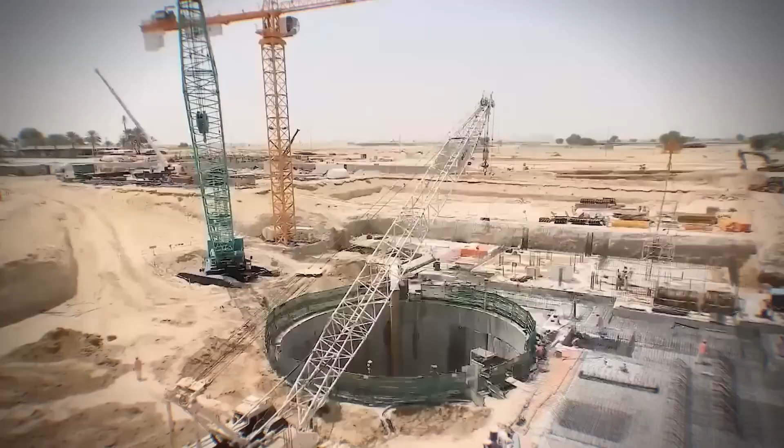During the construction of the world's deepest diving pool in Dubai, when a tunnel 45 meters deep had already been excavated, the engineering team faced an unexpected obstacle. News emerged that in Poland, a diving pool called Deep Spot had recently opened, with the same depth of 45 meters. It was clear that if Dubai wanted the world record for the deepest pool, its depth would have to be increased from 45 meters to 60 meters.

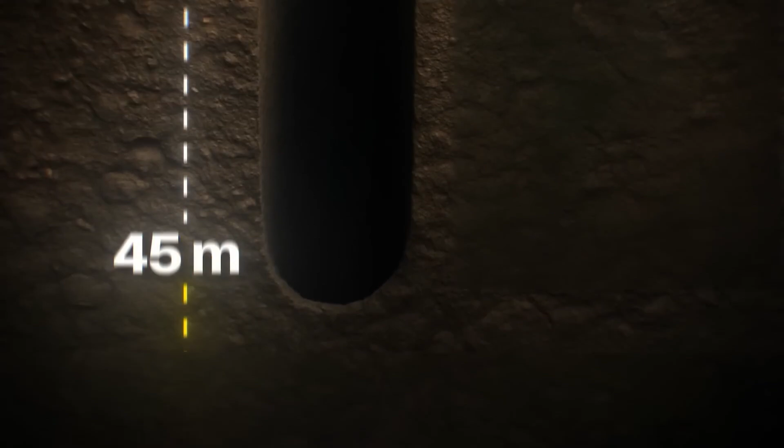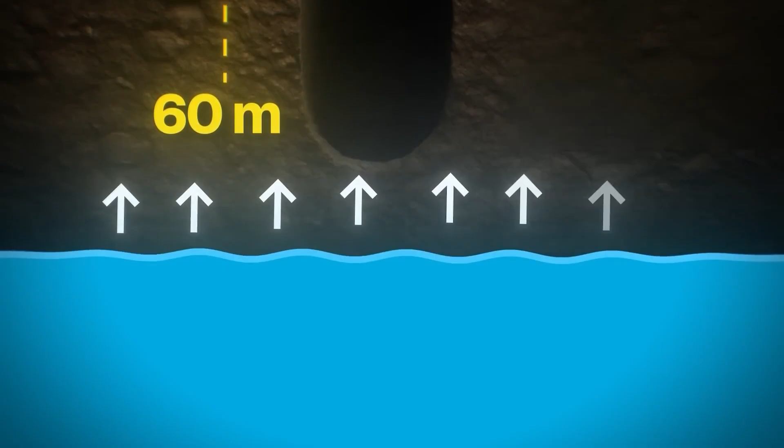But this task, while easy to imagine, proved extremely difficult to execute. Experts calculated that if the pool's depth were extended to 60 meters, the pressure of the groundwater could easily push it upward. It is just like placing a filled water bottle into a pond. It remains at the surface because the buoyancy force of the pond water pushes the bottle upward from below. In the same way, the entire pool could at any moment be lifted out of the ground.

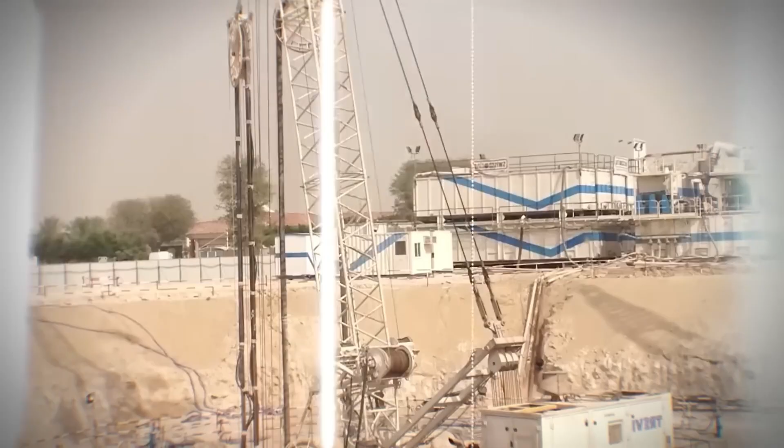At this stage of construction, Dubai's dream of building the world's deepest pool seemed to be collapsing. But then, one idea changed everything. When it comes to setting world records, the very first name that comes to mind is Dubai. With 425 Guinness World Records, Dubai still holds the #1 position in the entire Middle East, and it seems that the city's rulers are determined not to lose this title at any cost.

Among these world records came another addition built at the request of Dubai's Prince Sheikh Hamdan bin Mohammed bin Rashid Al Maktoum, now known worldwide as Deep Dive Dubai. But Deep Dive Dubai is not just a swimming pool. It is an extraordinary world of its own.

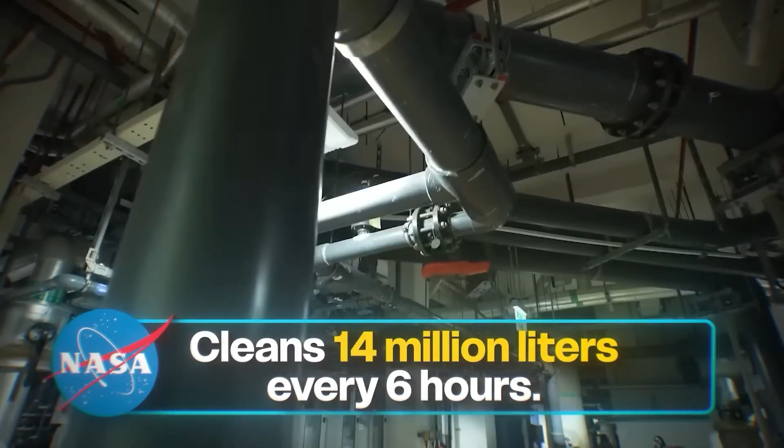At a depth of 197 feet, or 60 meters, it is the deepest pool in the world, containing nearly 14 million liters of water, the equivalent of 6 Olympic-sized swimming pools, or the amount used by 90,000 people in a single day. It was also difficult to keep the pool water clean. With NASA's assistance, a system was developed that filters all 14 million liters every 6 hours. Whether the outside temperature is 50 degrees Celsius or 20 degrees, the pool water is always maintained at 30 degrees for the comfort of divers.

But here, more than the features of Deep Dive, we are interested in its construction techniques because the engineering community believes that Dubai's deepest pool is nothing less than an engineering marvel. During the construction of Deep Dive Dubai, engineers faced several challenges. Without wasting time, let us look at them one by one. The very first challenge was planning and design.

Crown Prince Sheikh Hamdan wanted a design that could reflect a glimpse of Dubai's cultural values. Before oil and tourism, pearl diving was a major occupation in Dubai. Professional divers would plunge into the open sea without scuba gear. They would search for seashells, extract the pearls, and sell them. A large part of Dubai's economy once depended on pearl diving.

Keeping this idea in mind, Deep Dive was given the shape of a seashell, one that, from a distance, resembles an open shell lying on the seashore. But that was only the external facade. The real question was how to build the world's deepest diving pool inside it. Architects and engineers from around the world were invited to contribute realistic ideas for this project.

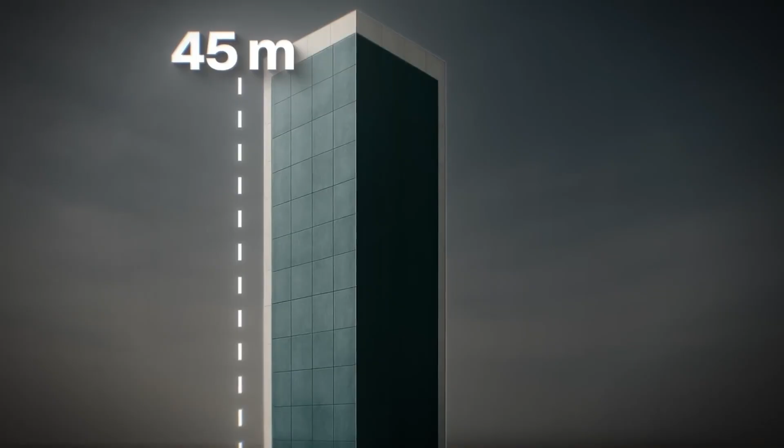The simplest suggestion was to construct a strong building 45 meters tall and fill it with water. But this design had a problem. Such a pool would indeed be 45 meters deep, but to qualify for a world record, the pool needed to be built below ground, not above it. There was another issue. Dubai is an extremely hot city. If the pool were constructed above ground inside a building, the outside heat would affect the atmosphere of the pool as well.

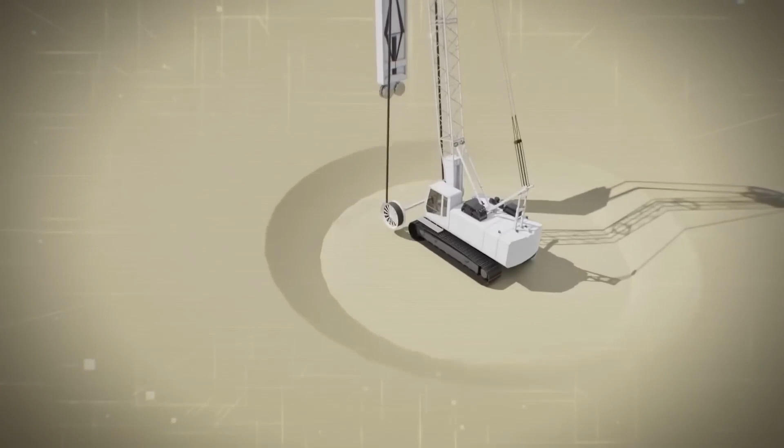The Crown Prince of Dubai wanted not only a pool with a remarkable design, but also one whose depth would be spoken of worldwide. That is why the decision was made to dig the world's deepest diving pool underground. A vertical shaft would be excavated in the ground. And with that, a new challenge began: excavation.

The shaft was planned to be 65 feet wide and 147 feet deep. It was not only to be excavated, but also lined with a wall along its borders to prevent it from collapsing. In engineering terms, this wall is called a diaphragm wall. To carry out this task, a special excavator was brought in.

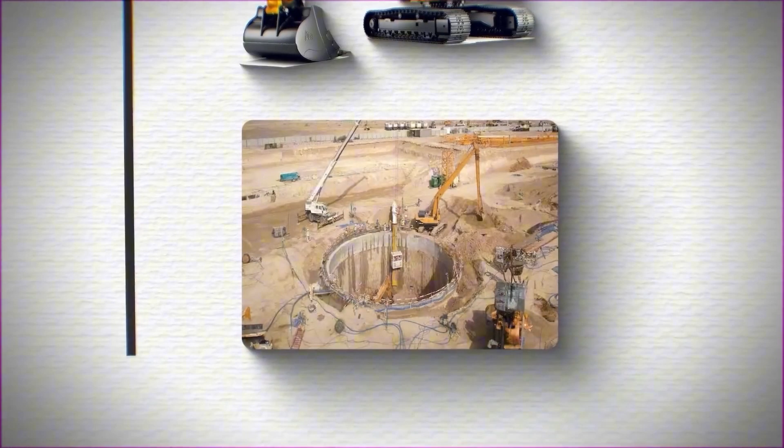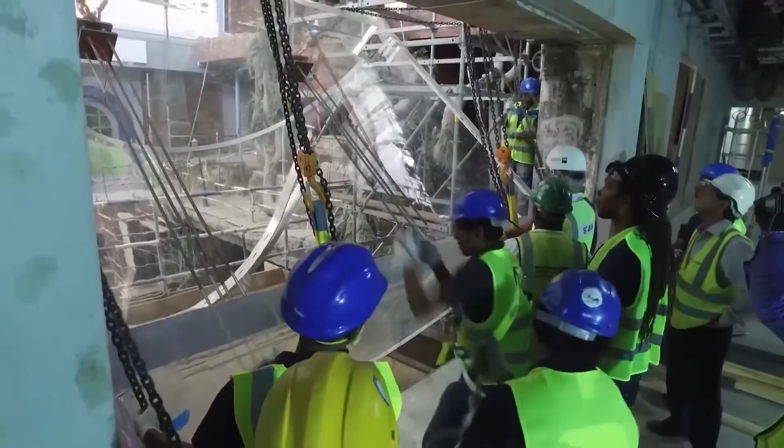With the help of the machine, a trench as wide as a pillar was dug to a depth of 147 feet. A steel cage was then placed inside, and the trench was filled with concrete. In this way, small sections were completed one by one until the entire diaphragm wall was constructed. This whole process took more than 2 months. After that, excavation work began.

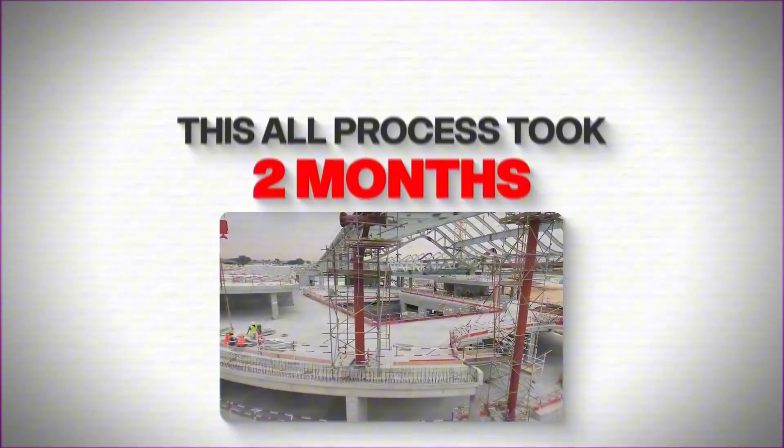The plan was to dig in increments of 5 meters, down to 45 meters, the depth to which the diaphragm wall extended. But after only the first 5 meters of excavation, a new challenge appeared: dealing with groundwater. When the diaphragm wall had been completed and excavation started, water began seeping up from underground at a depth of just 5 meters. Since the diaphragm wall had been built in separate sections, tiny gaps remained within it. Through these gaps, groundwater began to seep in easily and collect inside the tunnel. Without managing this water, it was impossible to continue excavation.

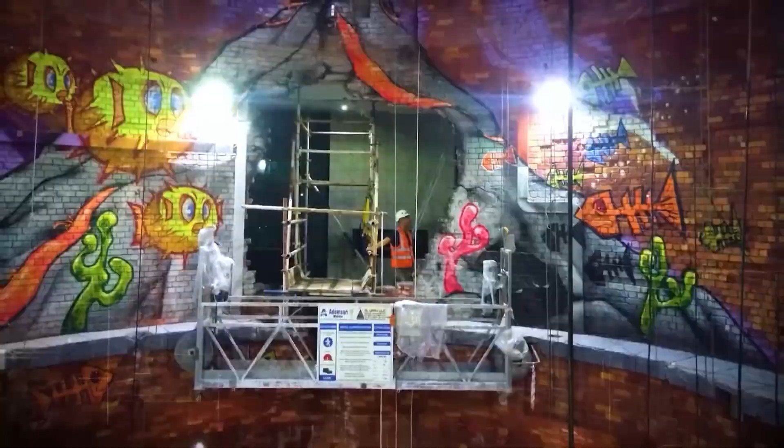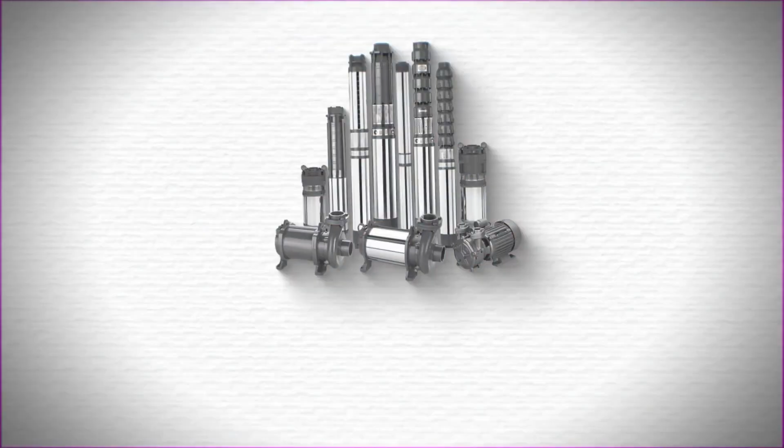To address the issue, pumps were installed that continuously drained the water, allowing excavation work to proceed alongside. Excavation went on for the next 2 years, during which the pumps also had to run constantly. For Deep Dive Dubai, a total of 45,000 tons of soil, sand, and rock debris was removed. But once the pumps were switched off after excavation, water began to fill the tunnel again. In this situation, it became essential to waterproof the diaphragm wall thoroughly before the pumps could be shut down permanently.

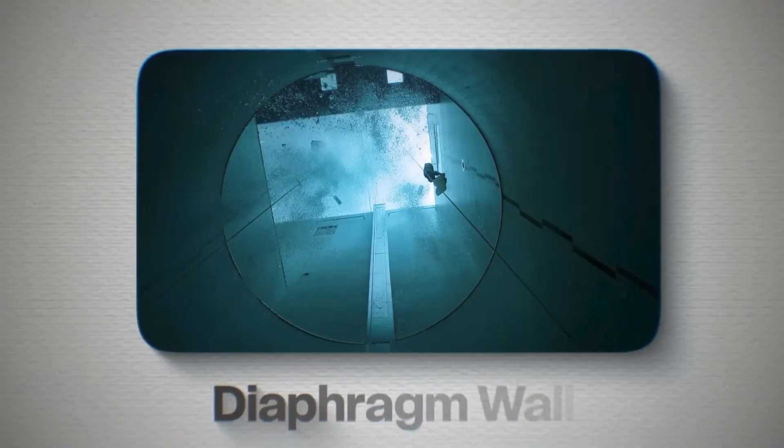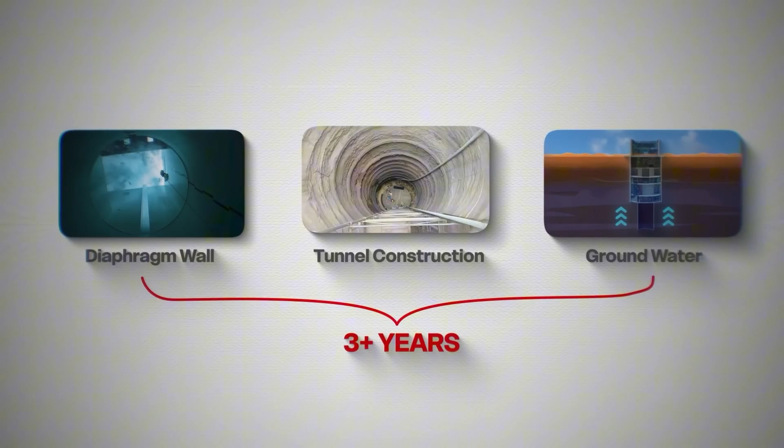Over the following months, extensive waterproofing of the diaphragm wall was carried out. Only after this process was complete were the pumps finally turned off. From building the diaphragm wall to excavation to waterproofing against groundwater, the entire process took more than 3 years. By this stage, the engineering team was already running behind schedule, and every single day had become precious.

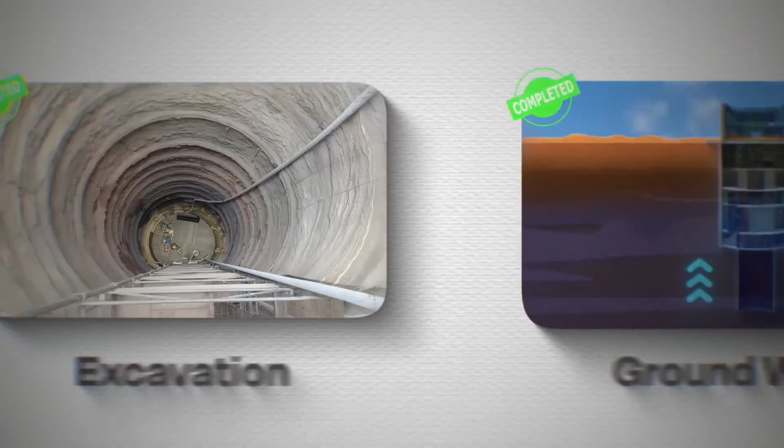But during the construction process of Deep Dive, a new crisis arose. The diaphragm wall had been completed, the excavation was finished, and the groundwater issue had been managed. At that very point, news arrived that near Warsaw, the capital of Poland, a diving pool named Deep Spot had opened, and its depth was also 45 meters, or 147 feet. This news struck the entire Deep Dive project team like lightning, because all their hard work so far had been aimed at breaking a world record.

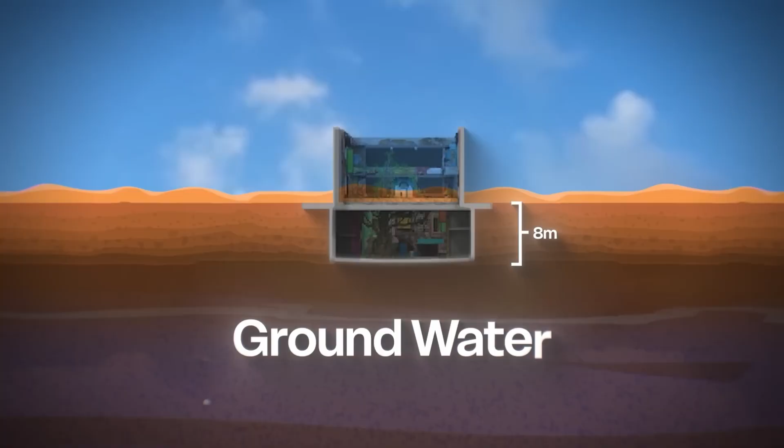Normally, the details of such projects are kept highly secret, and the same had been done in this case. When the Crown Prince of Dubai learned about this, he requested that the depth of Deep Dive be increased further so the world record could still be secured. But there was a serious problem. At just 8 meters below ground, groundwater was already present, extending all the way down to 45 meters. This meant the groundwater was pushing upward against the entire pool from below, a force known as buoyancy.

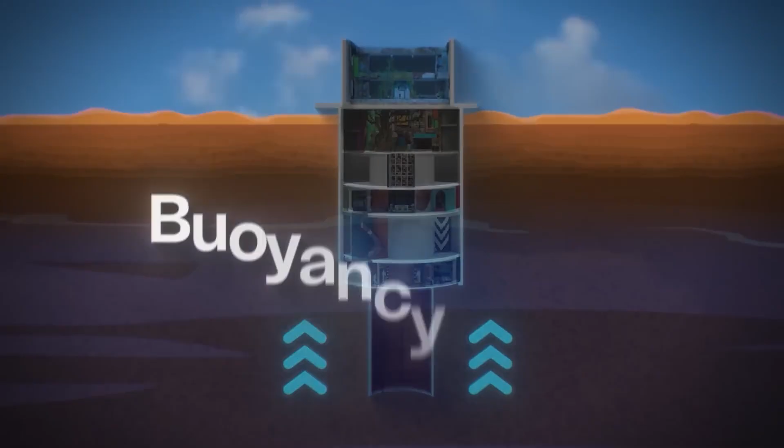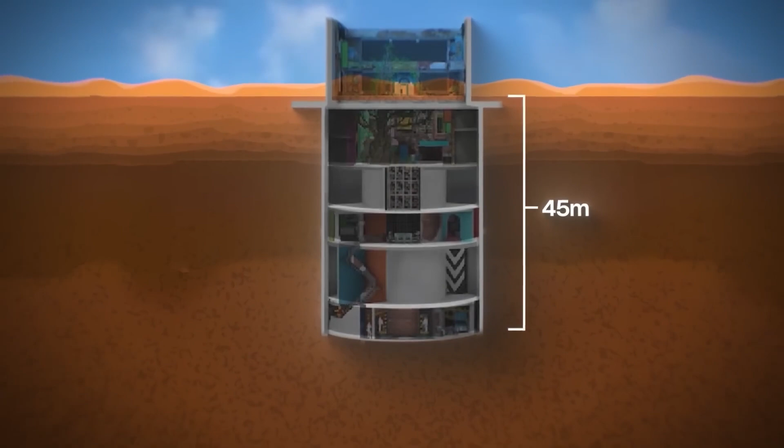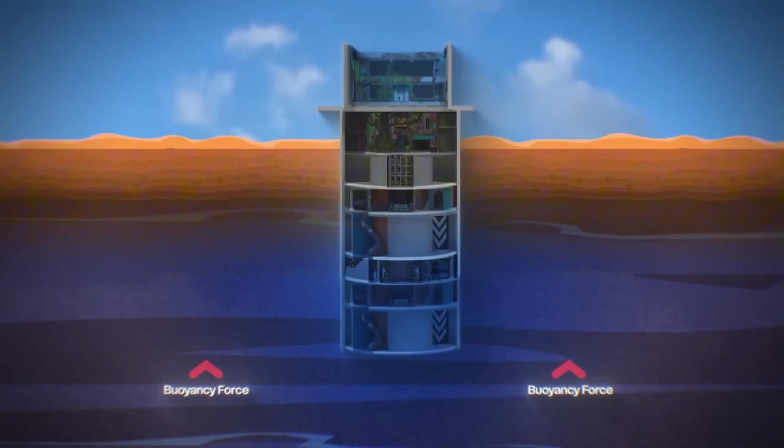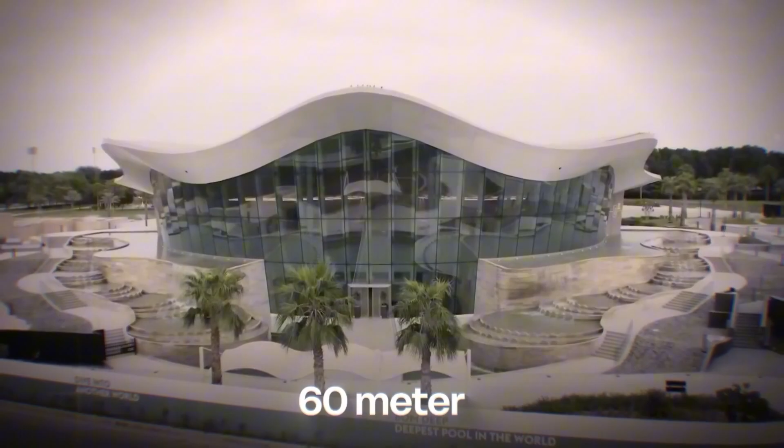Engineers had already calculated how to cancel out this buoyancy force with the weight of the water that would fill the pool. But those calculations had been based on a depth of 45 meters. If the pool's depth was increased by another 15 meters, the buoyancy force would also increase. In that case, it was entirely possible that the pool, along with the entire diaphragm wall, could be pushed upward out of the ground. Just as an anchor holds an entire ship in place, in the same way, under-reaming kept the entire structure firmly anchored to the ground. Through this technique, the depth of Deep Dive Dubai was extended from 45 meters to 60 meters, making the project once again eligible for the Guinness Book of World Records.

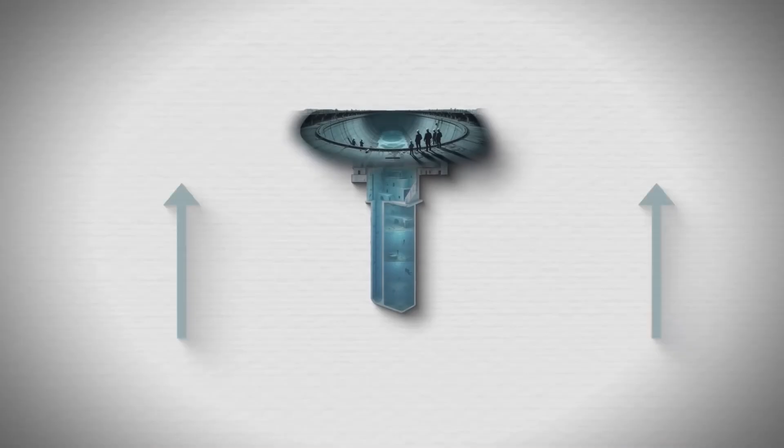But the challenges were not yet over. As the days passed, keeping the 60-meter deep tunnel empty of water became increasingly dangerous. This was because the buoyancy force could only be countered by the weight of the water inside the pool. If it remained empty for too long, the entire structure could be lifted upward by the groundwater pressure. The next step was to fill it with 14 million liters of water. But there was a problem. Dubai's water supply authority could provide only a limited amount of water. At that rate, filling the pool would take 3 months.

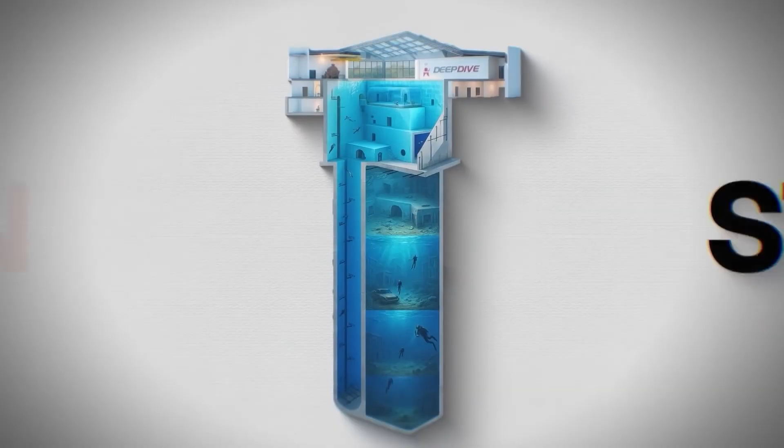To meet the deadline and speed up the process, more than 100 water tankers were brought in to support the supply from the water authority. The massive scale of Deep Dive can be understood from this. Even with these arrangements, it still took a month to completely fill the pool. Once the water was added, some items inside began to float. To solve this, holes were drilled into those items and extra weight was placed inside them so they would no longer rise to the surface.

After all the finishing work was completed, Deep Dive Dubai was first opened in 2021 for special guests and then for the public in 2022. The cost of building Deep Dive Dubai has so far been kept secret by the Dubai government, as in their view, this is a priceless project.